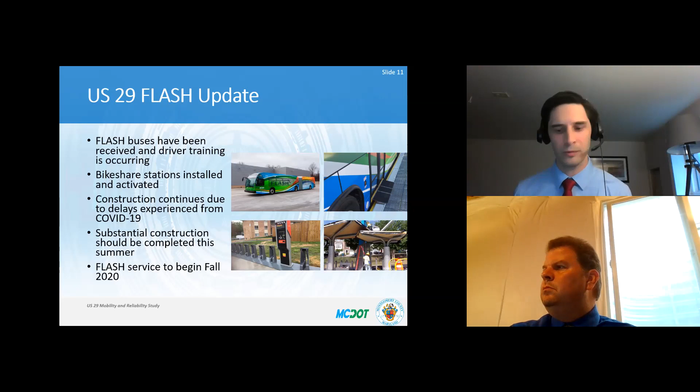In terms of the presentation agenda, we're going to go over study purpose and goals, touch on existing conditions, dive into the alternatives that were studied, the results of the analysis performed on those alternatives, touch on the proposed recommendations, and then go into next steps.

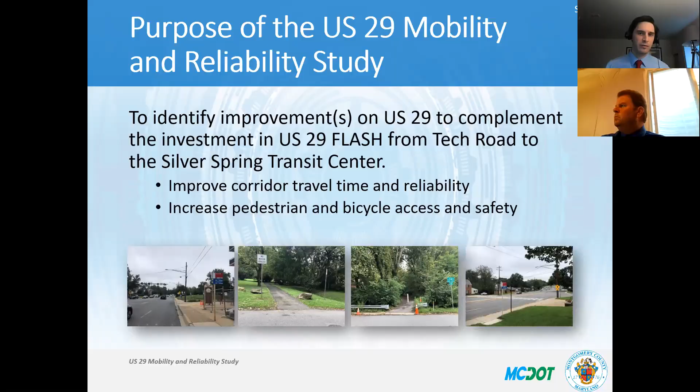The purpose of the study is to identify improvements on the US 29 corridor to complement the investment in the US 29 Flash project from Tech Road to the Silver Spring Transit Center, with the goals of improving corridor travel time and reliability for all users, not just the transit users. This includes bikes, drivers, and increasing pedestrian and bicycle access and safety to the stations, as well as within and along the corridor.

In terms of the schedule, we're still very early in terms of the overall schedule for a project such as this. We're in what we would call facility planning phase 1, where we're really just examining alternatives and trying to identify the project that would move forward into more detailed engineering. At the conclusion of this phase of the study, the findings of the analysis and the comments we received from the public will be shared with the planning board as well as the county council. At that time, county council may choose to identify a recommended alternative or alternatives to advance into more detailed engineering. All of that would be funding dependent.

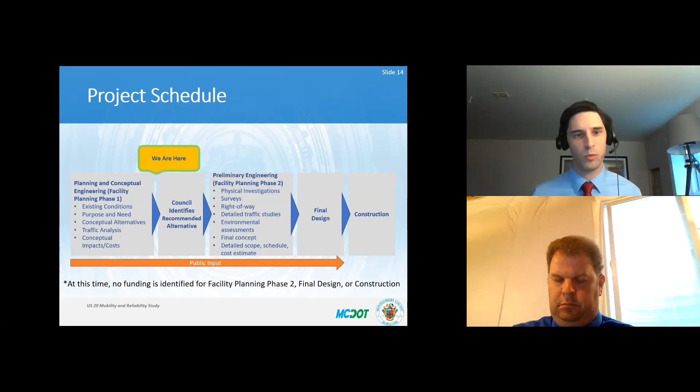In facility planning phase 2, more detailed engineering and investigations would occur relating to surveys, right-of-way, environmental assessments, and final concepts would be developed. At the conclusion of that stage, an ask for funding would be submitted to move the project into final design and construction, if it was deemed to be a project that the county wanted to move forward with. Throughout all of these processes, there'd be numerous opportunities for public engagement. I will note that at this time, no funding has been identified for facility planning phase 2, final design, or construction. So at the conclusion of this work product, there is no further work identified at this time, but that's not to say more couldn't occur when we do receive funding.

We have done stakeholder participation throughout the life of the project. We've engaged with the corridor advisory committees early on for the US 29 BRT corridor. We held an open house back in November 2018 when the project was just getting started, and then again this virtual workshop this evening. We've also engaged our partner agencies at various points along the project, including staff from Park and Planning, MDOT-SHA, and MDOT-MTA.

I did want to touch on some of the comments we received from the first workshop. I know it was a while ago, but we went through and categorized the comments. We received about 70 comments at that first workshop. The majority were tied to traffic congestion, with a second grouping relating to BRT lane location - comments about whether it should be in the median or the curb, and where it should be. There were also a number of comments about roadway design, signal operations, and general operations.

So with that, I'm going to turn the presentation over to Paul. He's going to talk through the existing conditions, the alternatives, and our results.

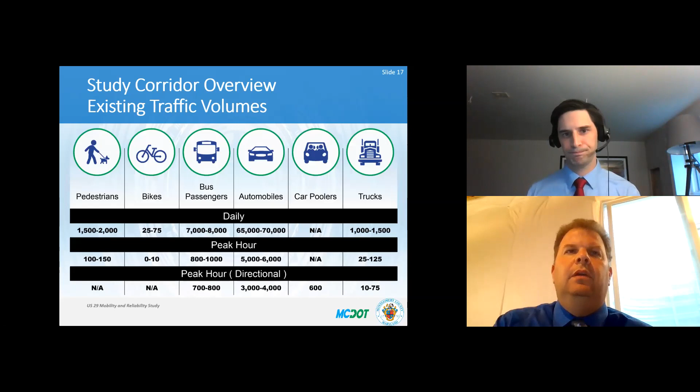Thank you, Corey, and thanks to everyone for attending tonight and for your interest in the project. We're very much looking forward to your input and feedback. So I want to start with some numbers for the project and the corridor, just to give a framework for the existing conditions as we move into alternatives and results of our analysis.

We have information on daily, peak hour, and rush hour directional traffic volumes. We have several thousand pedestrians moving through the corridor daily, much of that focused down inside the Beltway in the Silver Spring downtown area. Not a lot of bicycle traffic, but we have a tremendous amount of bus passengers - almost 8,000 a day, up to 800 in the peak direction, southbound in the morning and northbound in the evening. We have a lot of car traffic, obviously this being an expressway type roadway as you head north towards the northern end of the corridor, about 3,000 to 4,000 in a single direction during rush hour.

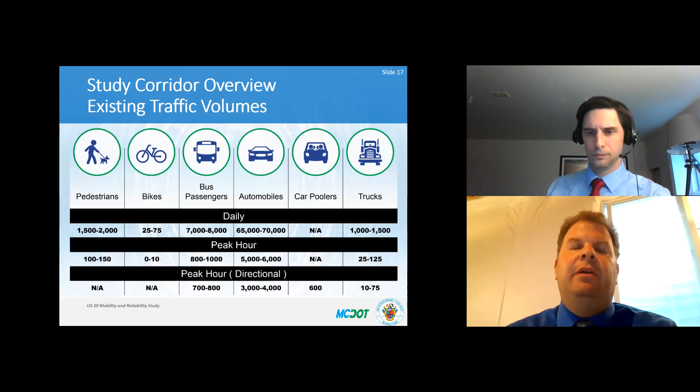When we did some surveys, we found a really good propensity for carpooling - during rush hour, some cars had multiple occupants. This really frames out how the corridor is being used. When you add up the carpoolers and the bus passengers, it really is 20 to 25% of the total traffic on the road. That's something we definitely noted and considered in developing the alternatives and how to develop bus priority options to move more people.

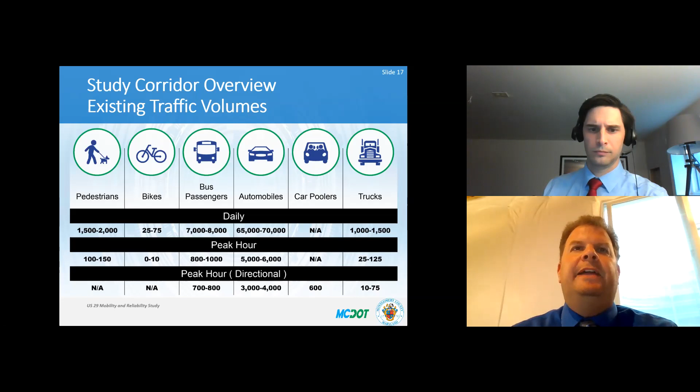This is some observed data from various sources, traveling the corridor roughly from Tech Road to Georgia Avenue in downtown Silver Spring. Today you have express bus service, local bus service, and regular passenger car traffic. It takes about 25 to 30 minutes for passenger cars and express buses to get through that part of the corridor in the morning, a little less heading north in the outbound direction. In the evening, a little under 20 minutes to just over 20 minutes for cars and buses.

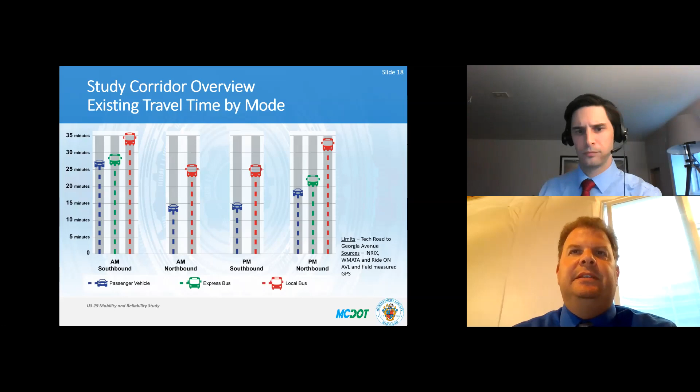To reframe the existing conditions, this study actually reviewed and synthesized over 36 previous studies from the past several decades - studies specifically related to transit and BRT conducted by the county, state highway, and MTA. There were also US 29 standalone traffic studies, countywide and regional transit studies for the BRT network, and functional master plans such as the bicycle master plan. All of these recommendations were synthesized to see what type of improvements would be relevant to evaluate for this study.

So what we developed in terms of alternatives that we evaluated are several corridor-wide alternatives, and then several spot improvements and demand management improvements.

Starting with the corridor level alternatives, we had a full-time dedicated median bus lane alternative that ran from Tech Road all the way down to approximately Sligo Creek Parkway. This was the alternative developed by members of the CAC committee, and we took it whole cloth and evaluated it in this study as one of the alternatives.

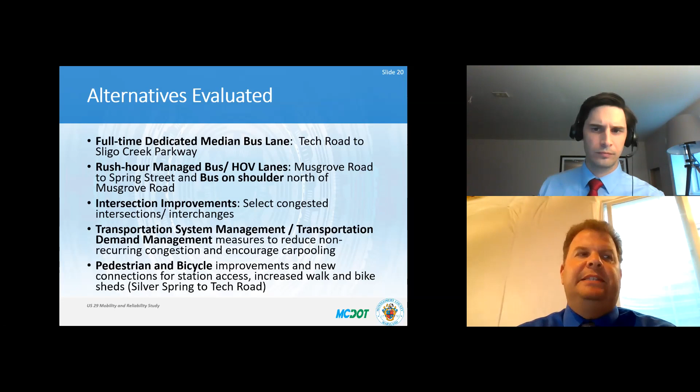So how did we evaluate these alternatives? We looked primarily at three quantitative metrics: first, person throughput—how many people does it move through the corridor; second, travel time—how long it takes for each mode, cars or buses, to get through the corridor; and the traditional traffic engineering metric of intersection and segment level of service and delay.

Lastly, a qualitative impact assessment on neighborhood traffic impact. It was absolutely our goal in this study to not create alternatives that would result in motorists seeking alternative routes through neighborhood side streets. We really wanted to keep the traffic on 29 and keep it moving, and I hope you'll see that our analysis and alternatives bear that out.

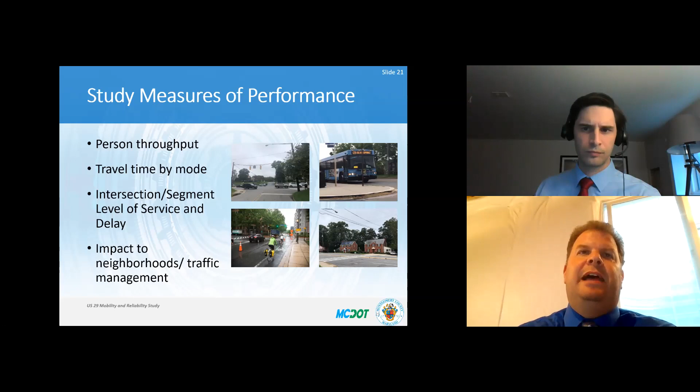Just a little bit about future traffic. We developed long-range traffic projections out to about 25 years, using the county's travel forecasting model and assumptions about growth in households, jobs, and population in the corridor.

In more detail, this is in the report, as well as detailed level of service maps for every segment and every intersection are in the report. We encourage you, if you're interested, to go and dig it out.

I'll reiterate, as Corey mentioned, the study's been going on for a couple of years now. All of our existing data was pre-COVID, so we're not out there collecting data or making predictions based on what's happening during this unusual time.

So, if there was no action taken in this corridor—knowing this project is really aimed at addressing long-term transportation improvements and investments in the corridor—if you did nothing, 15 intersections would be forecasted to fail level of service E or F in at least one rush hour, and 21 segments would be forecast to fail in at least one rush hour.

Travel times for vehicles would nearly double in the morning, particularly in the southbound direction. And transit travel time for the express bus or flash would increase by 10 minutes in the peak direction, largely because, if there was no action, buses would still be allowed to use the shoulders as they do today in sections north of the ICC and 650.

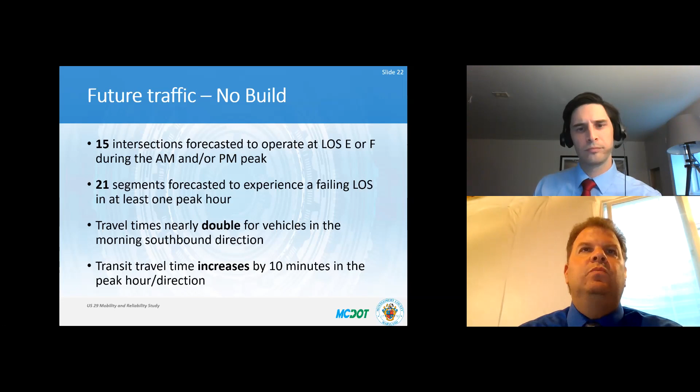So I'm seeing a couple questions pop up. I'll stop for the chat moderator to see if there are any quick answers we can give now before I get into the alternative cross sections.

Sure, so we got two questions that came in. The first is: will this median bus lane mean removing the median from Sligo to Four Corners? I'd like to go through these slides to show you exactly what it does to the median—these next series of slides should answer this question.

Great, let's go ahead and do that then. Was there another question to address right now? Yeah, there's one other one—it said the travel time slide had limits of Tech Road and Georgia Ave.

Do you have travel time information for south of Tech Road and how this section is affected by the alternative options? We do have the results of the travel time analysis in a later slide for all alternatives and for the full corridor, not just south of Tech Road, but Burtonsville all the way down to the transit center. Hopefully these questions will be answered. If not, we'll be happy to address them again during the chat.

Jumping into the median bus lane concept, again, this was the concept developed by the CAC committee members. Actually, if you dig deep into the report, it was initially proposed under a state highway study back in the mid 1990s as well, something somewhat similar.

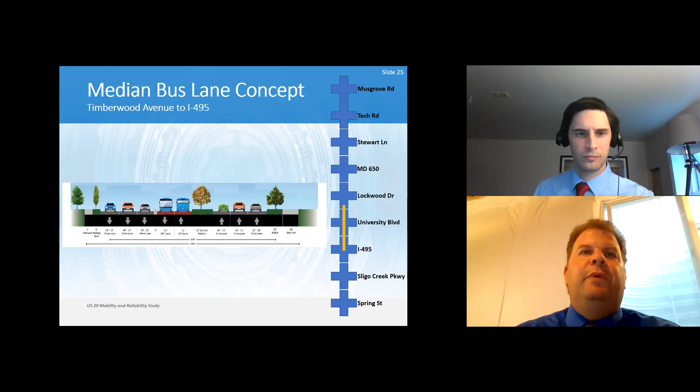Then when we get into the Four Corners area proper, around University Boulevard and down to the Beltway, there is a change to the existing roadway for regular travel and car lanes, which provide 4 lanes in each direction today. In this section, they would be reduced to 3 lanes in each direction, and the lanes would be slightly narrowed to provide 2 bus lanes, 11-foot bus lanes, in the median at all times. The next slide shows a picture of what the station would look like, with a further widening in this area to provide a station for flash buses in the median in the Four Corners area, keeping the lane reduction for cars in each direction.

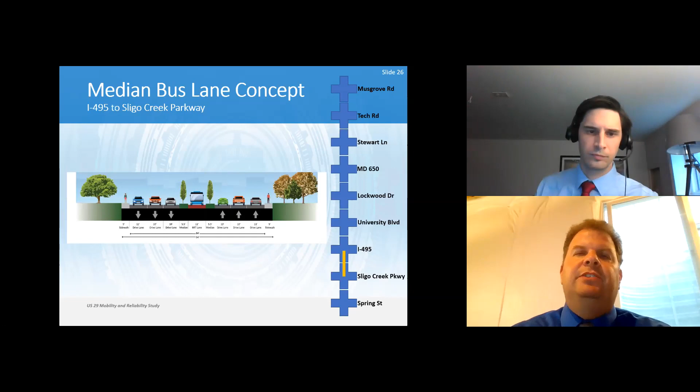As we get south and inside the Beltway and down to Sligo Creek, again no change to the number of car lanes. It goes back to as it is today, 3 lanes in each direction, and we'd reconstruct the median, slightly narrowing some of the other lanes, to provide a single reversible lane in each peak hour direction for the buses to use.

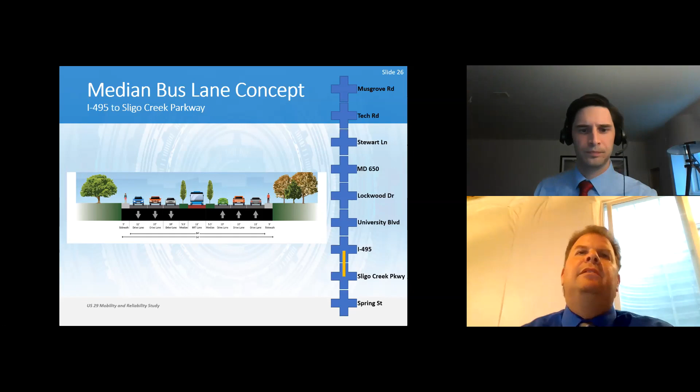In summary, the alternative and geometry would require some new traffic signals to get buses in and out of the median bus lane. Some lane width changes would be required to narrow the lanes for cars and other vehicles. The cross section would also be changed in the Four Corners area, reduced from 8 to 6 lanes to provide 2 bus lanes and the station. It would require some permits and waivers for changing the width of the lanes, and some other impacts to environmental features.

The traffic impacts of this alternative are actually pretty severe. It has more failing intersections than the no action condition, and I'll explain why in a few minutes - 17 intersections would fail. While it helps significantly with the bus travel time in the morning, keeping the Flash BRT service down to about 25 minutes from Burtonsville to downtown Silver Spring, it doesn't really have an advantage in the afternoon for the bus travel time. That's largely because when you take one of the regular car lanes away through Four Corners, going from 4 lanes to 3 lanes in each direction, it creates a lot of congestion for car traffic. That congestion spills back towards downtown Silver Spring as people try to exit Silver Spring and head north in the evening rush hour, and the buses get snarled in that traffic coming out of Silver Spring.

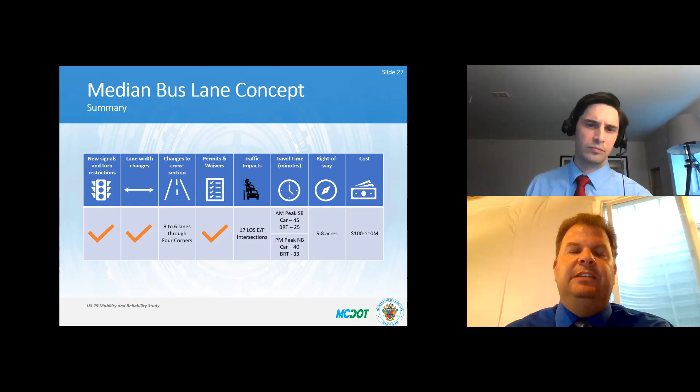Yes, so we do not have a slide for specific right-of-way impacts in the presentation. However, in the appendix of the report posted on the project website, there are conceptual engineering drawings that do have shading or call out where the potential right-of-way impacts would be. Again, I caution that this project is at about a 5 to 10% level of engineering design. It's very, very conceptual. We didn't run any topographic survey, we didn't pull extensive property records or plats. So this is very preliminary and would be refined should the project advance into final engineering design and any right-of-way permits that were needed.

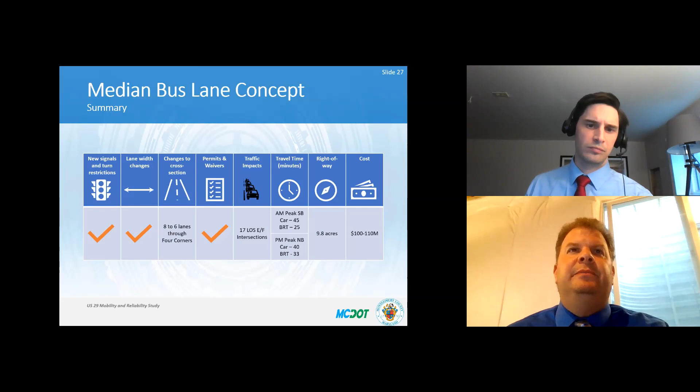So for the managed lane concept, we're going to start all the way up by Burtonsville and 198. Today in this segment, the buses are allowed to run on the right shoulder if they're interested in passing some queues of traffic at various signals, jumping through the right turn lane. What we are proposing is that the buses be shifted to the left side or inside shoulder, and that the regular travel lanes be shifted just slightly to the right. So there's the same number of regular travel lanes, and the buses would then be allowed to use that full-time, with some carpool lane access as well during rush hour.

Moving south, next slide, please.

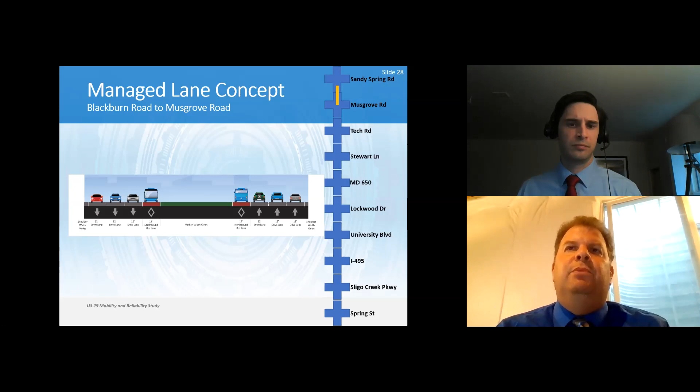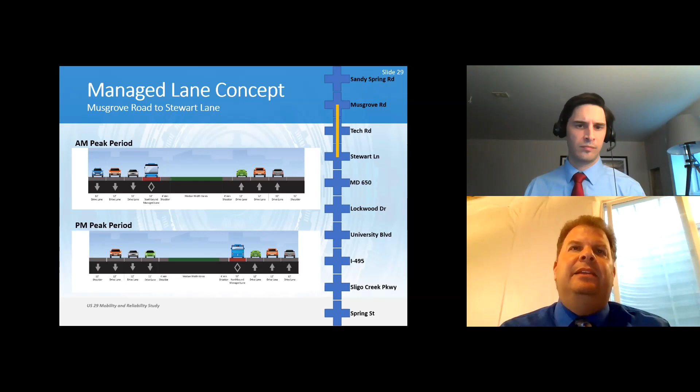In the section between Musgrove and Stewart Lane, again no changes to the number of existing car lanes would remain the same. But what we are proposing is that during rush hour, for example in the morning peak period when southbound traffic is heading to downtown Silver Spring, the left lane be converted through signing and pavement marking to a carpool and bus lane only, and the 3 travel lanes be shifted to the right, allowed to drive on the right shoulder to maintain the same number of car lanes all the way through. At all other times of day it would remain as it is today, and in the evening, heading outbound, that left travel lane would be converted to a bus carpool only lane, and then the 3 lanes would remain, shifted slightly to the right, being allowed to drive on the right shoulder. So that's why we manage this lane at different times of day and for different uses.

So next slide, next section please.

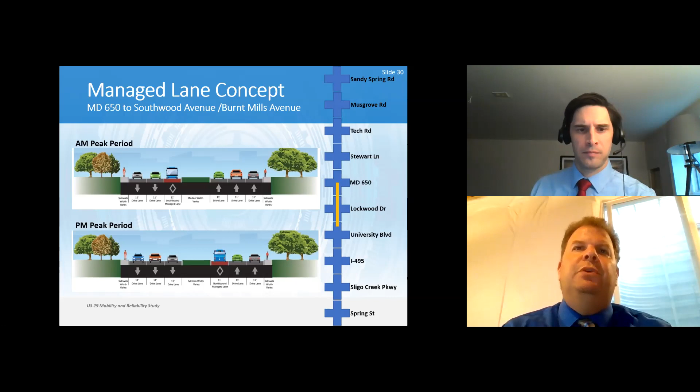As we get into the Burnt Mills area south of 650 to approximately Southwood Avenue in the southbound direction, and from Burnt Mills Avenue to 650 in the northbound direction, this is where our traffic models told us the best benefit would occur. We would be converting one of the existing travel lanes during rush hour, only in the peak direction, to a bus and carpool lane, and that would be reversed in the evening. The outbound, northbound direction, the left lane would be converted. At all other times of day it would remain exactly as it is, with 3 lanes in each direction.

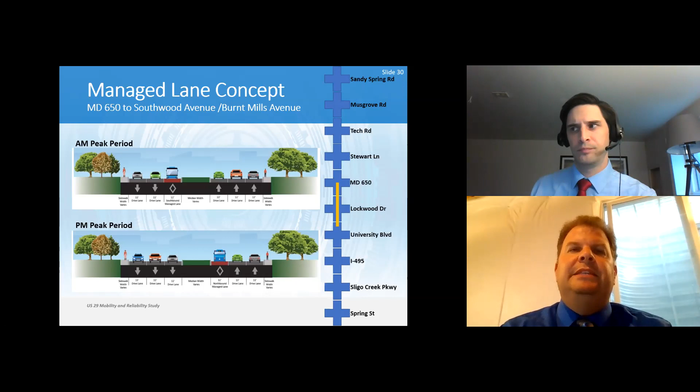From Southwood or Burnt Mills, there would be no changes to the cross section. The flash buses would run in regular traffic, based on our analysis, as these aren't congestion points, with some other intersection improvements we'll talk about later. It would then run down to the existing section between Sligo Creek Parkway and Spring Street, where the reversible lane exists today. What we would propose is that reversible lane be rededicated to buses and carpools only, so southbound in the morning and northbound in the evening. No other changes to the cross section in that segment at any other time of day.

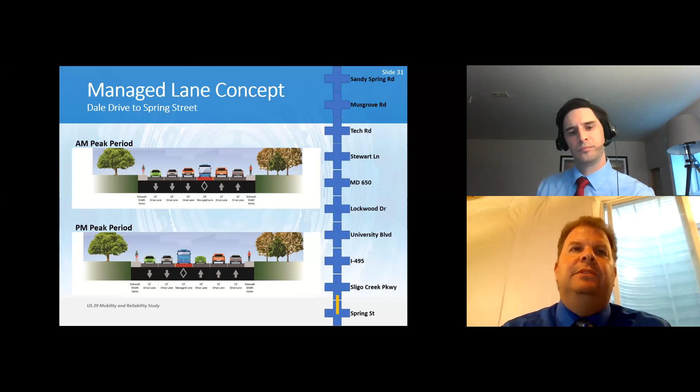So in summary, in the managed lane concept, although it doesn't provide end-to-end consistent dedicated bus lanes, it hits the hot spots. There's no new signals or turn restrictions required, no changes in lane widths required. All the lanes stay as wide as they are today.

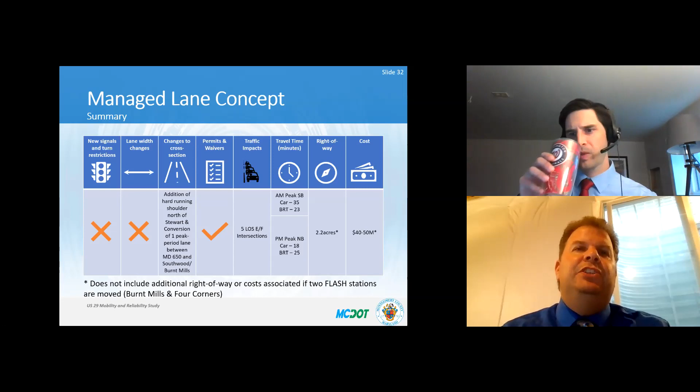There is a change to the cross section in terms of the section between Musgrove and Stewart, where we're allowing general traffic to ride on the shoulder to maintain the same number of lanes. And then again, between 650 and Southwood, southbound, and Burnt Mills northbound, where we would be proposing a single lane conversion to bus and carpool. This still would require some permits and waivers even to do the stuff on the shoulder. The shoulder may need to be reconstructed.

In terms of traffic impact, it significantly improves the performance for all intersections. Only 5 remain congested. The travel times are also significantly improved, almost doubling from existing conditions if you took no action. The car travel time holds about steady from Burtonsville all the way down to the transit center, about 35 minutes, but the BRT and carpool travel time really zips along at about 23 minutes. And in the northbound, the car holds very nicely at 18, the BRT and carpool about 25.

Right-of-way impact with the retrofits we're mainly doing is only 2.2 acres, which might be a little bit larger if any flash stations are relocated down the road if this is built. And the cost is significantly less — about half the cost of the median bus lane concept, at 40 million to 50 million.

So I want to stop here. I see some more questions popping up in the chat box. Yeah, we got a couple here. I'll just kind of go through them in the order they came in.

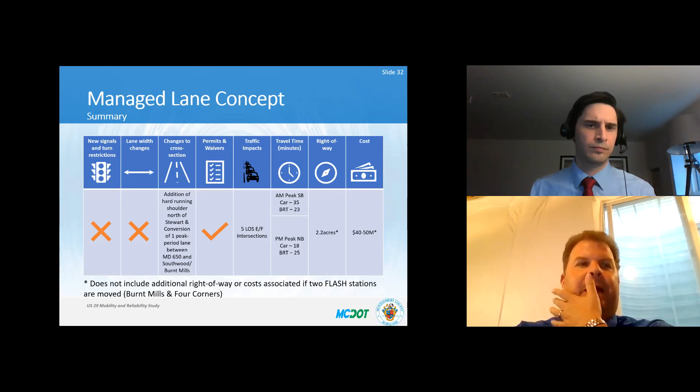Whether they be fully red painted asphalt, red tinted asphalt, or just hatched near intersections, with electronic signs overhead or static signs next to them—there's a lot of emerging guidance on this. We would work closely with Maryland DOT State Highway, since it's their roadway, on what gives the best positive guidance to motorists about what times of day and what vehicles are allowed. The report includes examples of those signs, signals, and markings, but the short answer is it's definitely possible the lanes could be painted red for some or all of the segments.

There's a question asking if the proposals take into account traffic patterns resulting from potential beltway expansion plans. Right now, the design we have for both the median bus lane alternative and the managed lane bus lane alternative, along with other intersection improvements you'll see in the forthcoming slides, are compatible with any future toll lanes on the Beltway. At this point we don't really know how that interchange and ramps would be reconfigured, so there's a lot more coordination needed during design. That's really all I can say at this point—information is still being shared about the toll lane study.

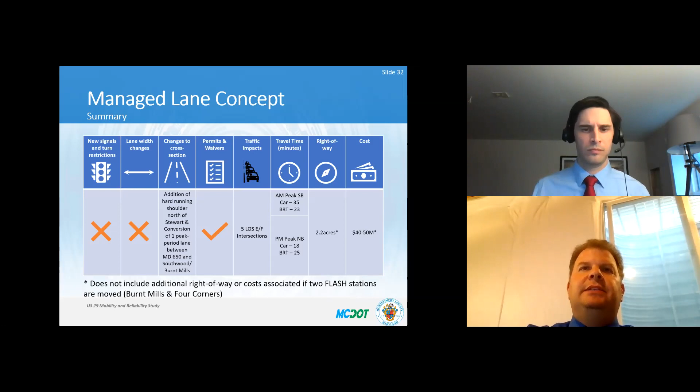A couple other things we wanted to include in this mobility package as we're defining our recommendations is a suite of transportation system management and demand management strategies. The goal of these strategies is to better manage the network we already have—the pavement, the signals—and also provide the best information to motorists and commuters so they can seek the best mode of travel, time of travel, and route to take.

At $1 to $5 million, we estimated these measures combined would include providing additional real-time electronic messaging signs to commuters as they come into Montgomery County from Howard County, so they could understand how long it would take to get to downtown Silver Spring, and whether they should park and ride or carpool on Flash. Also incentive programs the county could develop with large employers or other operators to encourage carpool, rideshare matching, transit use, bicycle share systems, and integrated corridor management plans—so that from a traffic control center at both the county and state, when incidents happen on one of the major north-south freeways, spillover effects on others are minimized.

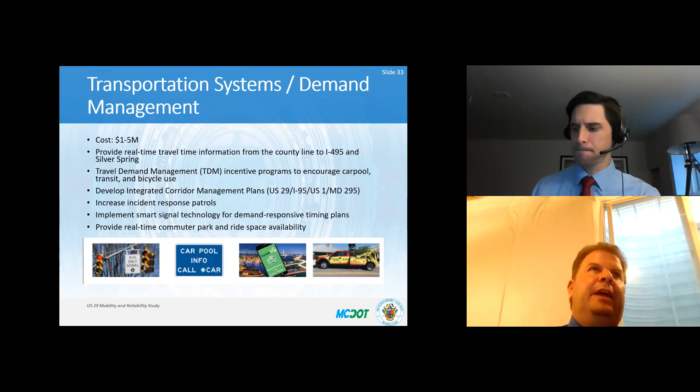And lastly, a really unique program to provide real-time parking space availability in the Flash commuter lots. The driver would know before turning into Burtonsville whether a space is left, or which lot to proceed to, so they wouldn't miss the connection or waste time driving around looking for parking. All of these are relatively low-hanging fruit that we feel would add to mobility in the corridor.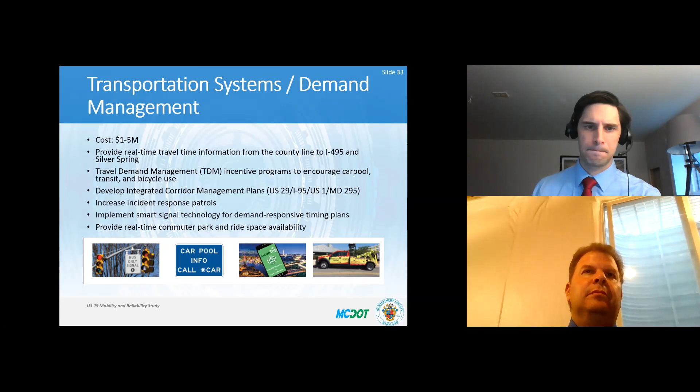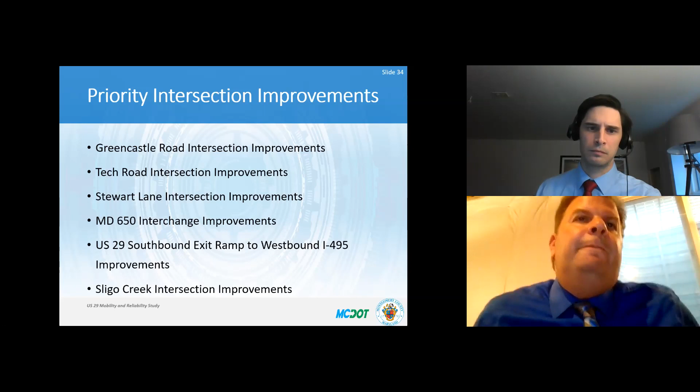Next we'll talk about priority intersection improvements important for the overall mobility package. There were 6 intersections identified with a failing level of service that we wanted to improve strategically throughout the corridor: from north to south, Greencastle, Tech Road, Stewart Lane, the 650 interchange, the I-495 interchange, and Sligo Creek. I'll go through each one briefly.

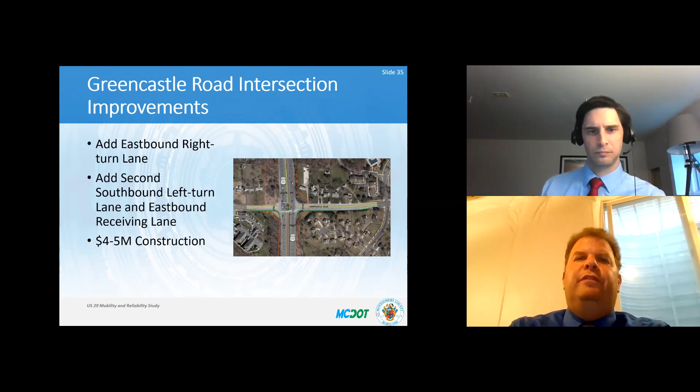At Greencastle, we're proposing to add an additional right lane for the eastbound approach, add a second left turn lane for the southbound approach, and widen eastbound Greencastle so two southbound lanes can turn onto it. That would be about $4 to $5 million in construction costs.

Next intersection, at Tech Road: we're proposing to add an additional second southbound left turn lane, and widen Tech Road to provide an additional westbound right turn lane onto northbound US 29. These improvements would cost between $2 to $3 million.

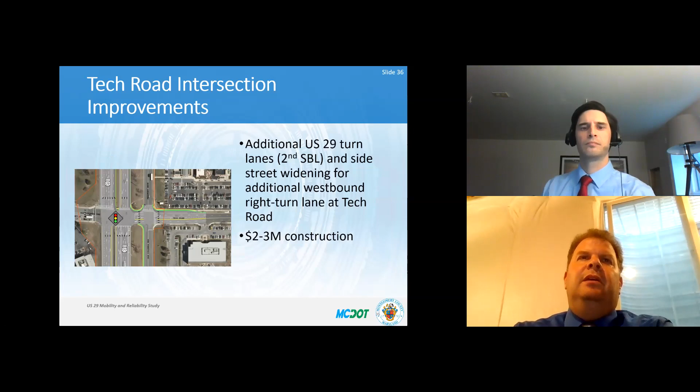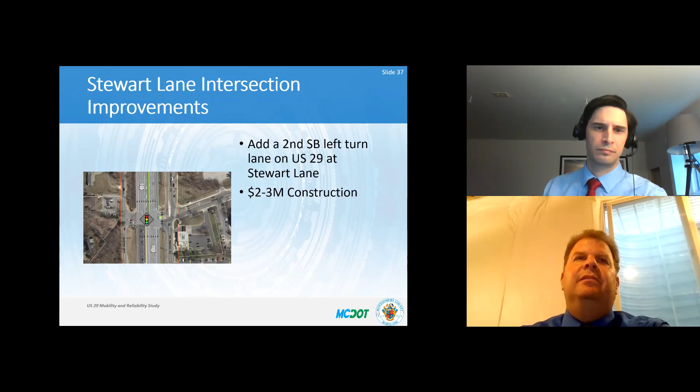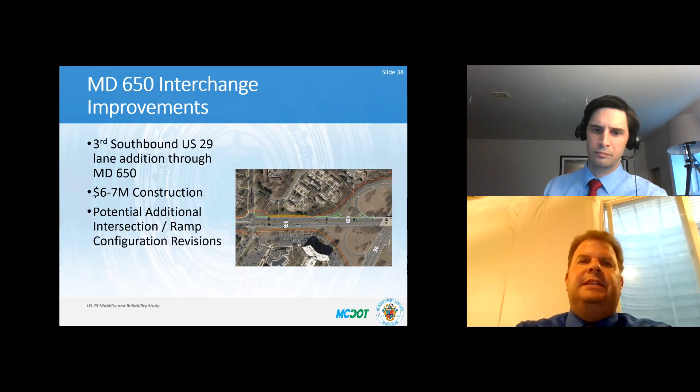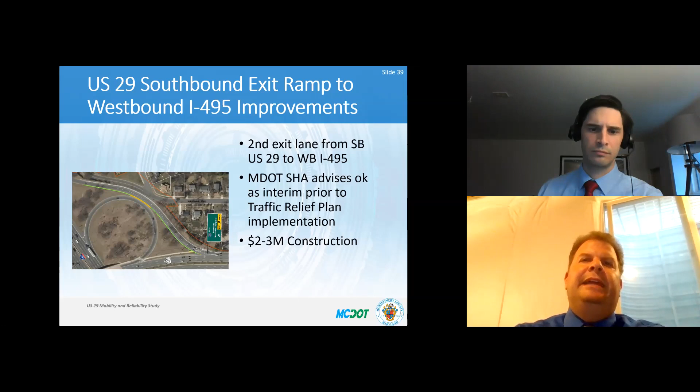At I-495, coming south on 29 for the exit onto the Beltway west towards Bethesda, we're recommending that ramp be widened to allow a right turn from the second to right outside lane on southbound 29. It would narrow to a single lane, and the acceleration lane once on the Beltway would be significantly extended to reduce friction. This would help reduce lane jockeying as drivers commute south through Four Corners, and even out lane utilization and reduce queuing. That would be about $2 to $3 million. As mentioned earlier, SHA has advised us that this is okay to do as an interim measure prior to any final decision or design on the toll lanes.

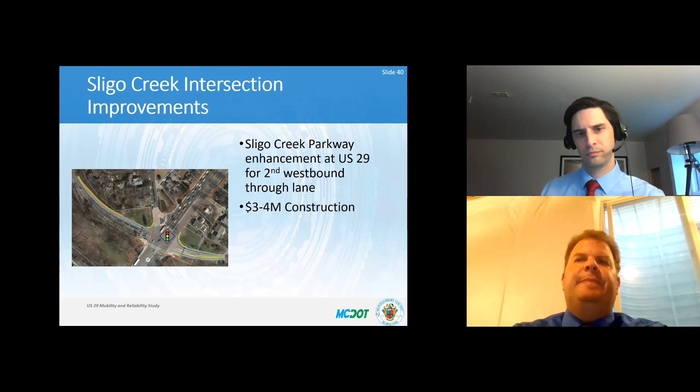And lastly, at Sligo Creek, we are proposing widening of Sligo Creek Parkway just through the intersection to provide a second westbound through lane on both the approach and the receiving side, to increase capacity for Sligo Creek Parkway. That is estimated at between $3 to $4 million.

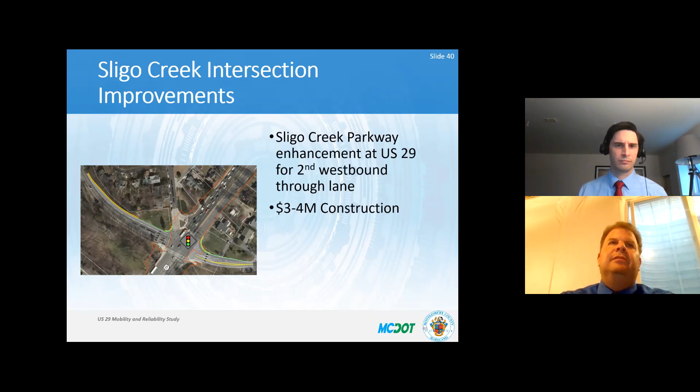Lastly, but certainly not least, for pedestrian and bicycle improvements, we took a long look at each flash station area. We looked at the surrounding land uses and the key connections where people wanted to come from and go. We really focused on about a half mile walk, a 10-minute walk, or a 2-mile bike ride, and looked at the existing infrastructure, what was planned or programmed through the bike master plan or other projects, and where the gaps and barriers were. We wanted to make this as comfortable a walking and biking environment as we could, making it seamless so people could get to these stations.

We identified over 200 individual walking and biking recommendations across these 8 stations. There are detailed maps on the website in the appendix of the report, and an itemized list for each improvement noting whether it's carried forward from a sector plan or the bicycle master plan, or if it's a brand new recommendation for the study. We're very interested if we missed anything, because we want input from residents who live in the corridor, work in the corridor, or may be walking or biking to the flash stations.

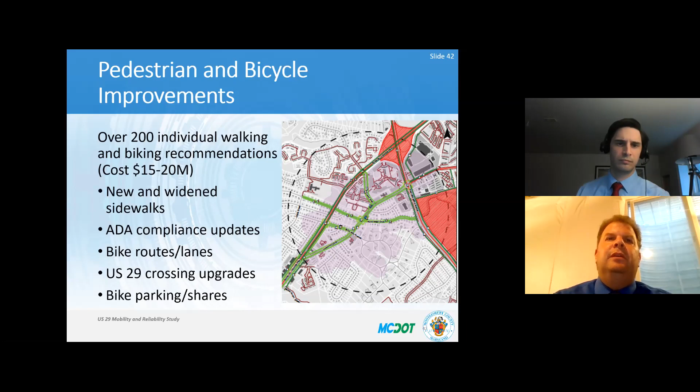Altogether, that was about $15 to $20 million to construct those 200 individual sidewalk and bike lane recommendations.

So again, just to bring us back to the summary of the results: the median busway results are mixed at best. There's definitely some transit benefit southbound in the morning, but there's a lot of impact for autos, particularly in the afternoon. And the buses don't really get much benefit in the afternoon, which is a big concern given the price tag is as high as it is.

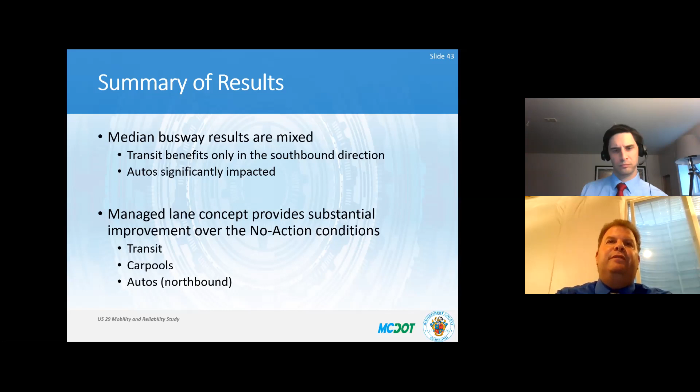The managed lane concept really provides substantial improvement over no action conditions. It benefits both transit and allows for carpools—the median busway didn't allow any carpools and didn't encourage that mode shift. So the managed lane provides that, and it also benefits autos. It really checks all the boxes in terms of cost, right of way, traffic performance, and travel time. Next slide, we have a few more charts summarizing this.

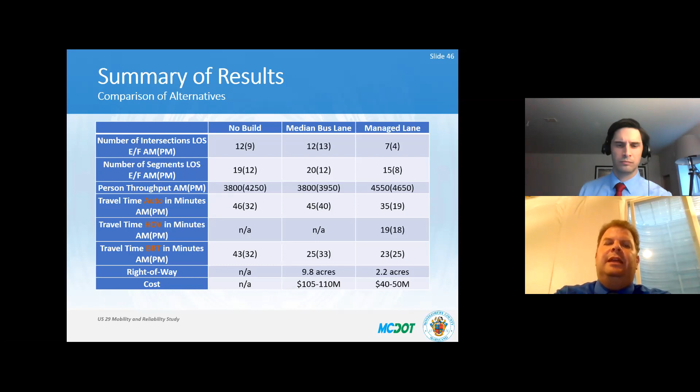It holds the line for cars while improving buses and carpools, and minimizes the right-of-way cost and impact. Of course, there is still a construction cost to do this, but operationally the benefit is on the order of magnitude that is positive for this. Next slide.

So our actual recommendations for this mobility package at this point—again, there'll be lots of future touch points for public input. The council needs to review this and consider it carefully. We are proposing to advance the managed lane concept at $40 to $50 million.

And that specifically means from Musgrove to Stewart Lane, running that peak period left lane, carpool and bus lane, right lane shoulder use. Between Southwood and Burnt Mills and 650, that peak period bus and managed lane conversion. And then just in the Dale Drive or Sligo to Spring Street area, the reversible lane conversion to a bus and carpool lane.

Right now, we're not recommending any improvements north of Musgrove Road, such as the left-side shoulder—we don't feel that has merit at this time to carry forward. We are recommending to advance the intersection and interchange improvements as a package of $20 to $25 million, and advancing the station access improvements as a package of $15 to $20 million.

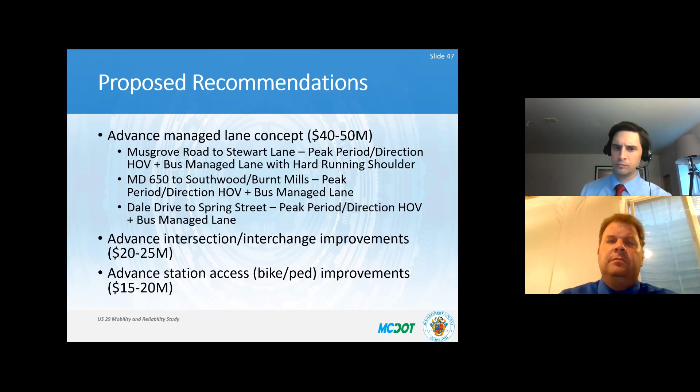Next slide. So these could be broken out into 3 projects. Right now, we're not recommending which order they're implemented—it's really a capital programming decision that the council and DOT will carefully consider in partnering with SHA.

But project 1 would be the pedestrian and bicycle projects—this really can be done independently, doesn't need to integrate with anything on the bus priority or carpool stuff. Package 2 could be the intersection improvements; we would certainly recommend that it has value to be done before the bus priority, but doesn't have to be, at those 6 intersections. And then lastly, the bus priority, the managed lane, and the part-time shoulder use construction and conversion. Next slide.

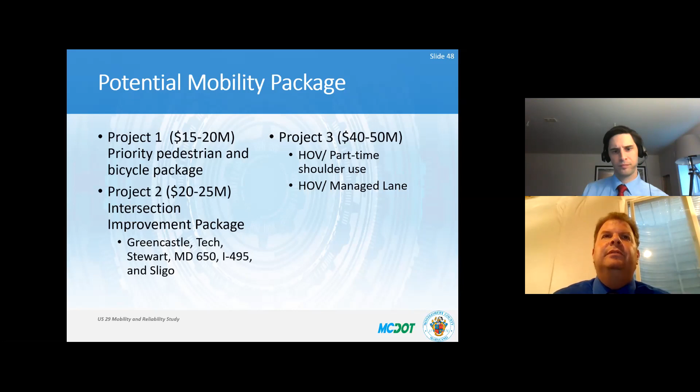Yeah, so we had 2 people asking about the widening of 29 near New Hampshire, and what impacts that would have on the bridge—kind of running over that.

Great question. I believe that there may need to be some widening of the bridge structure. I don't know if Matt wants to confirm that from the engineering design side, if he's able to be unmuted. We can get you that answer shortly.

Next question. The next question says it seems confusing that bus-only trip time northbound could exceed managed lane northbound—could you explain in a little more detail? Bus-only trip time could exceed... I'm sorry, let me try to read it in the chat screen.

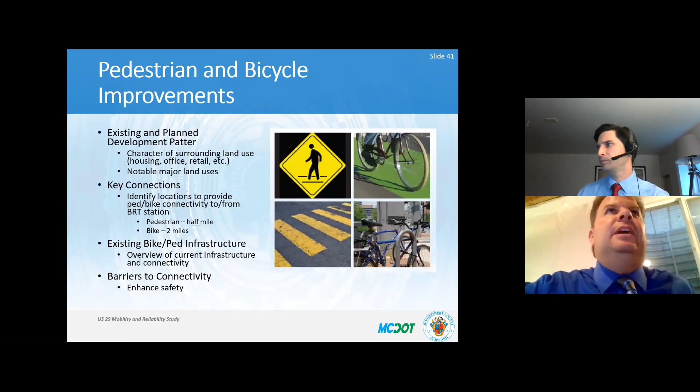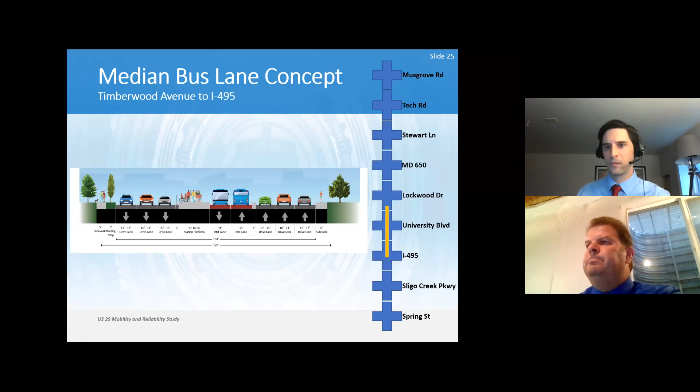Let's see, I see another question from user iPad 2, so I'm going to ask you to unmute.

Go ahead. I just want to make a comment on the median lane. You aren't using that as the top recommendation, but one of the downsides to it is it really will restrict ingress and egress to a neighborhood with almost 1,400 homes. There would only be the Southwood entrance from Route 29 into the neighborhood, and access via University Boulevard is not that convenient if you're traveling north on 29. So, I mean, it looks like that's not the recommended approach, but that is a major downside from the Northwood Four Corners neighborhood perspective.

Noted, thank you. And we said earlier in the presentation that it was our goal to minimize any impacts to the adjacent neighborhoods, especially since car travel times aren't really improving under that alternative, and we're restricting access. We're very mindful of that.

All right, we've got another question similar to one asked earlier, but sent again. Why did the median bus lane scenario result in the same AM person throughput as the no build? Was there no consideration of shifting modes from single occupancy vehicles to transit, including by better transit travel times?